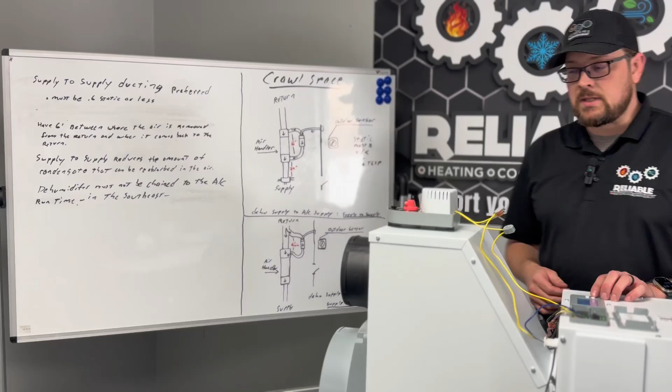Let's discuss a few things for installation on the board. So there are two ways that this can be installed in most applications. It is a return to supply, or supply to supply, is the way we've worded it here. And then the return to return, or again, we could word it supply to return.

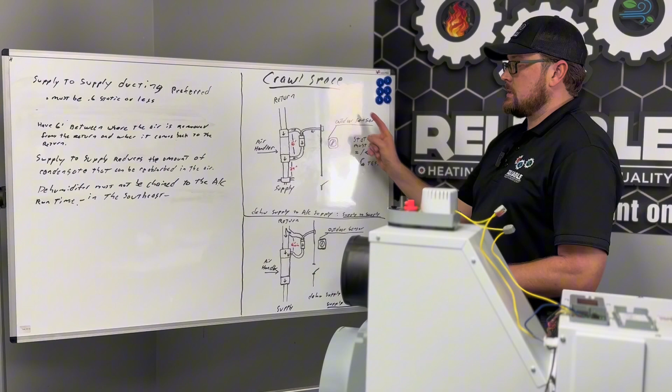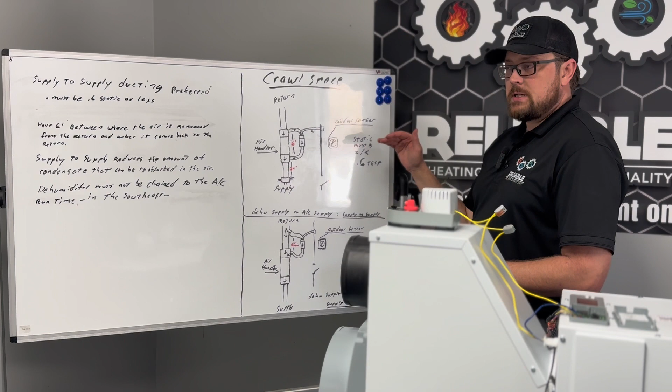So supply of the dehumidifier to the return of the unit, and the supply of the dehumidifier to the supply of the unit. For dehumidification performance, this is the superior mode that we've found. There's a couple things that we need to keep in mind. The system total static pressure needs to stay at 0.6 total static pressure or less before the dehumidifier is connected. If you're within that range, you can use this mode.

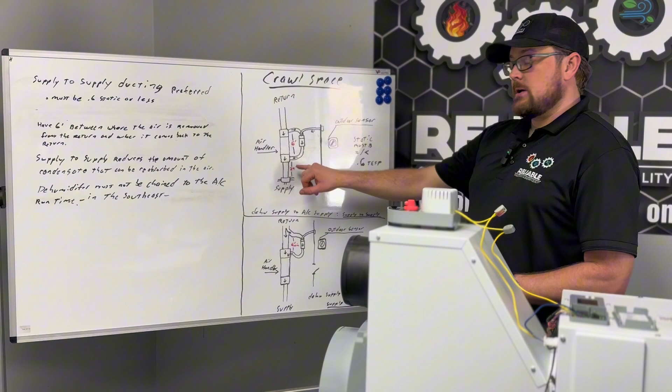They want about 6 feet on either configuration between where the dehumidifier pulls the air from and where it dumps it back into. And then in the supply to supply mode here, we need at least 24 inches for the air to mix before you begin branching off. This works really well with our setup because we have extended out where the supply runs come off of the unit.

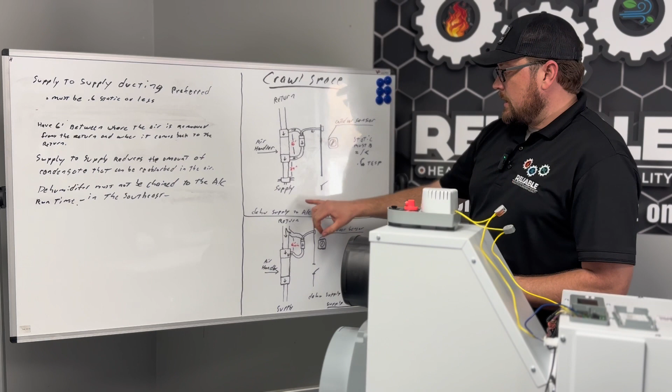The advantage going with the alternative here with return to return, we do lose dehumidification performance, but we do increase the amount of air that can be pulled in for fresh air ventilation, and it also works in higher static conditions, though we do want to make sure that our return is not starved for air.

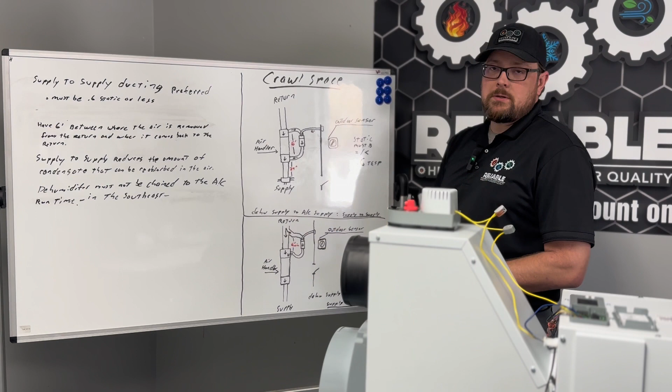A couple things to just run down again real quick to recap. Supply to supply is preferred for dehumidification performance, but static pressure must remain at 0.6 or less for total system static. There needs to be 6 feet between where the air is removed from the return and where it is reintroduced, and that's for both applications.

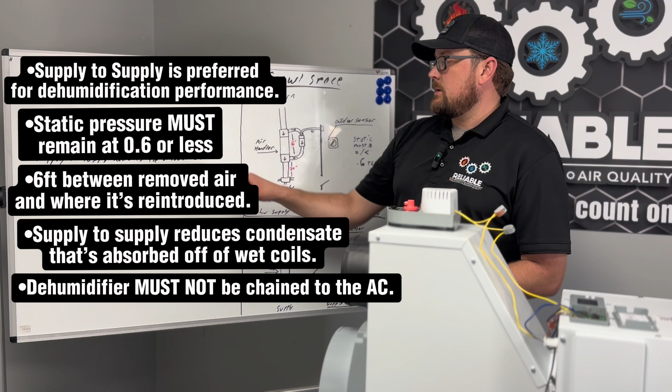And then supply to supply reduces the amount of condensate that's absorbed off of a wet coil, and that's part of what contributes to the increased performance. And then the dehumidifier must not be chained to the AC, at least in our region, the Southeast. In shoulder seasons or cooler days, we need that dehumidifier to run independently. So that's an overview of everything.